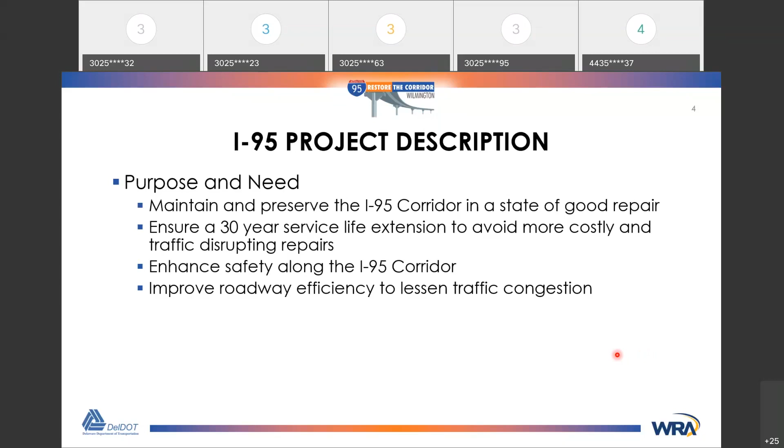So what are we doing? Well, we're going to repair everything within that corridor I just showed you. 19 bridges, several miles of pavement, including all the on and off ramps that access downtown. We are also going to be adding an additional lane on Brandywine River Bridge. When I say an additional lane, what I really mean is we're going to add an additional lane via striping, so you have 2 exit lanes to 202. That's going to be a safety improvement.

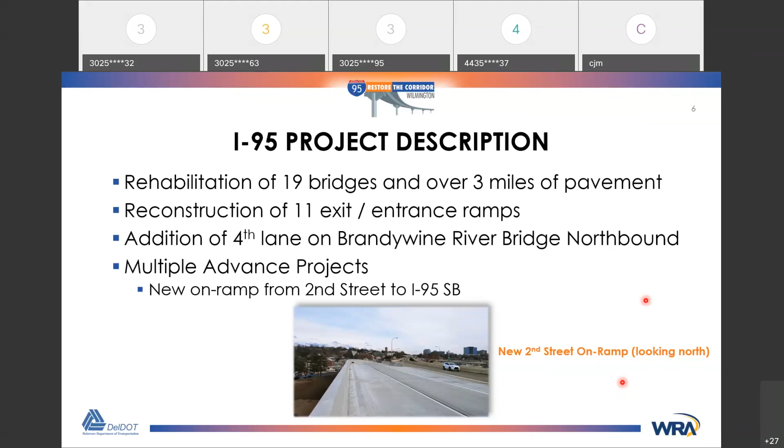Here we go. So here's what we really want to focus on tonight is our project schedule. As Craig had mentioned, we're really close to starting. And as I said a few minutes ago, in 15 days, we're going to start implementing some traffic control measures on I-95. And really what that means is our contractor, Kiewit Infrastructure, is going to be installing safety barriers, restriping the interstate. And the goal here is to ensure we have a safe work zone for their workers, as well as a safe highway for the motorists to travel.

So this is going to start the night of February 12th. Actual construction is going to start on March 1st. Now, the reason for this gap is it's going to take Kiewit 2+ weeks to get all of these controls in place. If you remember, I showed you that aerial view. This is a 4 or 5 mile long corridor, so it's going to take them some time to do this. And we want to do it safely, so we want to give them enough time to do that. But the big thing to remember here is February 12th, we're going to be starting to take a lane on I-95.

And in a minute here, Neil Leary is going to explain to you a little more in detail what to expect. I think one of the big goals here we've got is this 2 years of reduced lane capacity in I-95. We're committed to the 2 years. We're very confident of our schedule, and of course, weather permitting, we should be able to hit that 2 years. And of course, we'll do everything we can to minimize that or shorten that if possible. And of course, the overall construction is going to be 3 years, but the actual impacts to your commute on I-95 and using I-95, that's going to be 2 years.

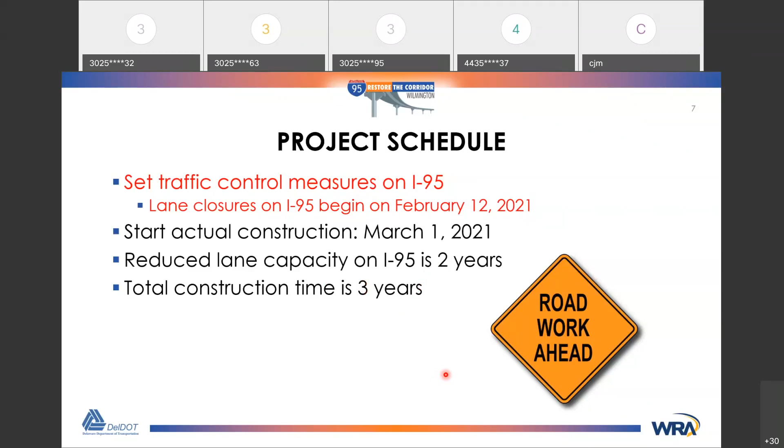But before then, what we want to focus on now is starting February 12th, for a 2-week period between then and March 1st, there's going to be some MOT or maintenance of traffic controls that are being put in place. And those, like I said, are necessary to ensure a very safe work zone. So I'd like to bring up to the podium, as it were, our lead traffic engineer, Neil Leary, and he's going to walk you through what to expect once this work starts on the 12th of February.

Neil? Thank you, Bill. Implementing the first phase of construction will occur over what we're calling a super weekend, starting at night on February 12th. There will be lane closures along I-95 southbound all weekend in order to remove and install pavement markings, remove and install guide signs over the roadway, and begin the installation of concrete safety barrier.

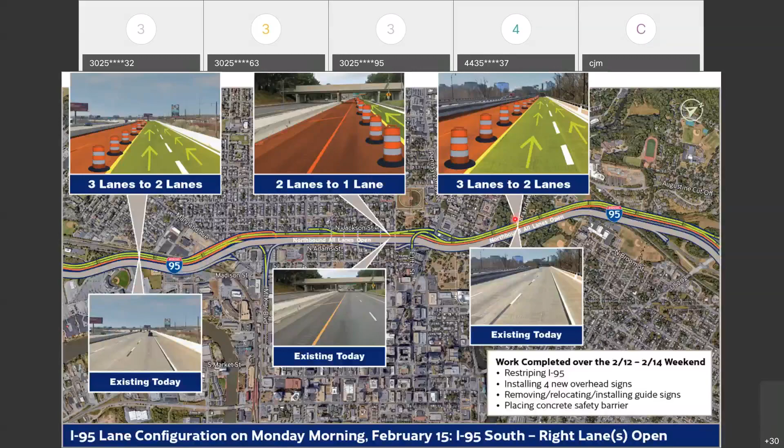In addition, over the super weekend, there will be a need to do nighttime, want to stress nighttime, closures of I-95 southbound on Saturday and Sunday night in order to remove and install new temporary guide signs which happen to span the entire width of the southbound roadway, requiring these closures.

All lanes on I-95 South traffic will be directed to exit the interstate at exit 7B and use Jackson Street to Lancaster Avenue, to MLK Jr. Boulevard, to Market Street, to access 495 South to get to 95 South. I-95 northbound will remain open during that closure. Next slide, Bill.

The following week will entail installing the remaining pavement markings, temporary guide signs, and concrete safety barrier that will ultimately separate I-95 northbound and southbound traffic on the southbound roadway, hence the teaser picture that Bill showed you earlier. This work will require some off-peak closures on I-95 South. Next slide, Bill.

I'm with you. I've just got these old computer keys here trying to get this.

Just bear with me, everybody.

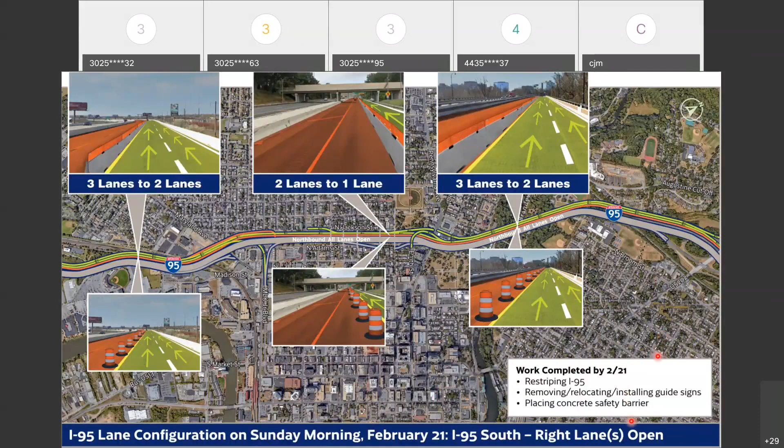Here we go. Okay. In addition, during that following week, there will need to be two, again, nighttime closures of I-95 southbound to install the concrete safety barrier that's in the city center area where there is insufficient width on the roadway to safely maintain traffic and install the concrete safety barrier.

During these closures, all lanes of I-95 South traffic will be directed to exit the interstate at exit 7B and use Jackson Street to Lancaster Avenue to Adams Street to the new 2nd Street ramp to get back onto I-95 South. Again, I-95 northbound will remain open.

I want to reiterate, these dates can change outside of the control of DelDOT or the contractor. For example, weather could play a part in this. But this is the current schedule of events to start the implementation of the first major phase of construction for this project. Upon completion of this work, I-95 northbound will begin to be impacted, which will be explained in a future public workshop. Go ahead, Bill.

Removing a travel lane 24/7 on I-95 will impact traffic, but DelDOT has been very proactive in developing solutions to mitigate these impacts. First effort is informing motorists to use the many alternative routes to get in and out of the city. These include 495, which has sufficient spare capacity to accommodate additional traffic, US 13, and state routes 2, 3, 4, and 9, just to name a few.

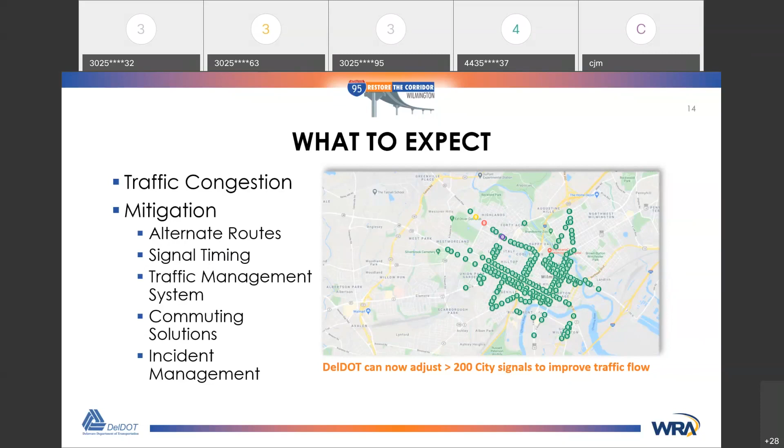Another effective way to mitigate traffic impacts is through the use of commuting solutions, which will be explained in significant detail later within this presentation. Yeah, Bill? Lastly, we all know that crashes can result in significant traffic impacts, especially within a work zone this complex. DelDOT is aware and has taken steps to minimize the traffic impacts associated with crashes. First, we have worked with the city, county, state, EMS reps, including police, fire, ambulance, and air response units, and have developed playbooks to provide information on responding to an incident given the work zone setup. We've actually developed 19 different playbooks for just the first phase of construction alone.

Second, tow trucks will be on site during morning and evening rush hours and on call in close proximity to 95 during the remaining hours of the day. The tow trucks will be deployed throughout the duration of construction to quickly remove vehicles from the roadway and reduce the congestion that's associated with crashes during construction. Go ahead, Bill.

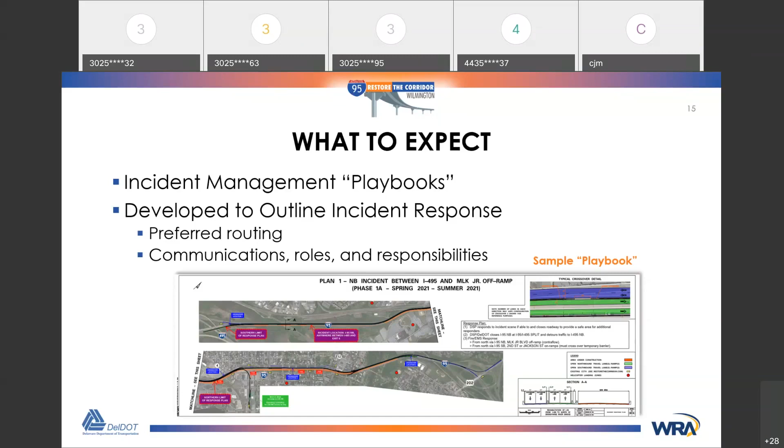Thanks, Neil. Obviously, you know what to expect. Any construction zone, we all realize that there's going to be noise, there's going to be dust, and I can tell you that our contractor, Kiewit, their contract requires them to do the work in accordance with the DelDOT noise policy. We actually have sent in the paperwork for a noise waiver, but the important thing is, we can't eliminate these issues, noise and dust and so on, but we can minimize them.

And with construction equipment in general, with hydro demolition, there are pumps that run this machinery. And then certainly there's a lot of concrete rehabilitation that takes place that will require concrete demolition. With dust and debris, our company is very committed to using a lot of water controls to keep the dust down from any demolition, which is also an OSHA requirement to protect the safety of our workers. We'll be implementing a lot of water controls to make sure that we keep dust to an absolute minimum on anything that requires concrete demolition or excavation.

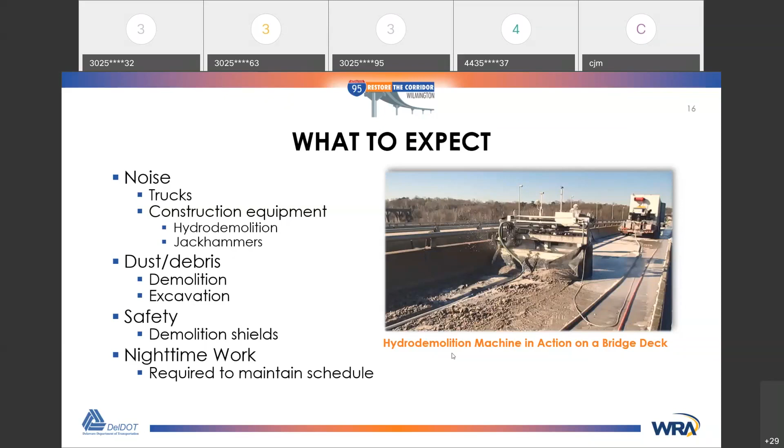So I think we're having some more. We got quite a few people on tonight, so our presentations are running really slow. So we'd appreciate it if everyone just bears with us as we get to the next slide here. So I'm going to reload the presentation, folks. I apologize. We just want to make sure

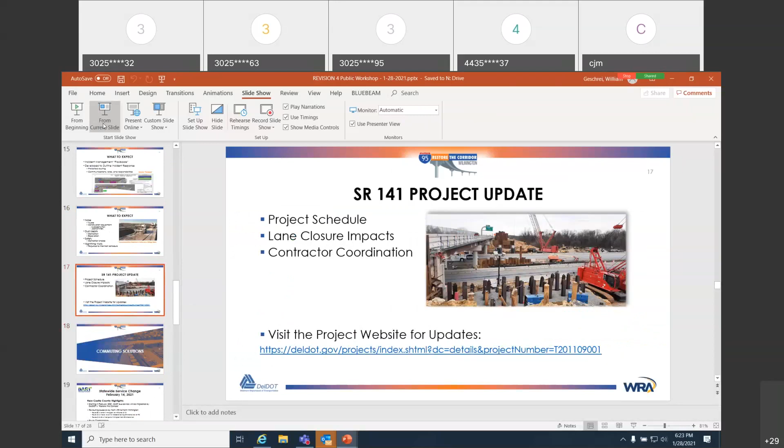So apologies for that. But while we had everyone together here, we did want to give you a quick update on the SR 141 project because it is so close to the I-95 corridor. So Sierra McLeod from the Department of Community Relations will give you a quick update. So hi everyone, this is Sierra McLeod, Director of Community Relations for DelDOT. And yes, we're focusing on the 95 project this evening, but wanted to take a minute to provide an update on another significant project, which is the ongoing reconstruction of Route 141 from the I-95 interchange to J Drive up near the Air National Guard and County Airport.

This 3-year project began in August 2019 and continues to make progress in what ultimately will be a completely rebuilt and improved interchange and corridor between New Castle and Newport. So we know everyone is eager to see this project finished, and at this time the project is on schedule for completion in spring of 2022. And we've made adjustments to get the remaining work done on I-95 first, where the new bridges are being built, so that there will be minimal impact on I-95 traffic as this project gets underway.

So the department has worked hard over the past 2 years to complete dozens of projects in and around the city and has not scheduled other projects that would impact primary detour routes until after the 95 project is done. So we're very sensitive to that, and we'll continue to keep the public updated as the 141 project moves towards completion, and know it will be welcome news to have this done.

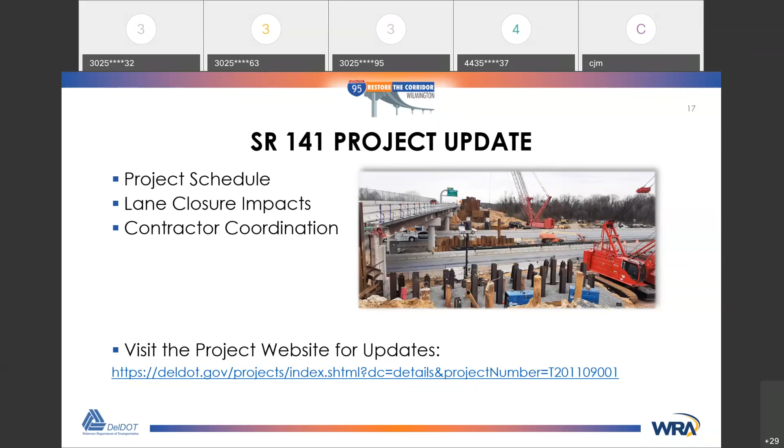Thanks, Sierra. So before we wrap up our presentation, one of the elements that's really critical is commuting solutions. Obviously, we'd like to have as many people avoid taking I-95. The less traffic we have, the better off we'll be. And so the department has come up with some options for those that commute or live and work around the area to be able to get to where they need to go. So we've got Kathleen Greer with us tonight from Delaware Commute Solutions to go through some of the options that'll be available to you. Kathleen?

Kathleen, are you on mute? Bill, I'm not sure she's on. Julie, are you on? You may have to do it yourself, Bill.

Well, I certainly can. I think it's pretty self-explanatory. And what's been happening over the last several months has been working with DART to really... Excuse me, Bill, I'm here. Oh, okay, great. All right. This is Kathleen Greer. Excuse me, I had to unmute everyone in order to have access, so a little difficulty. Sorry about that. That's all right. Take it away.

Anyway, good evening. Like Bill said, Kathleen Greer. I am the program manager with the Delaware Commute Solutions Group. And if that name is new to you, we were formerly called RideShare Delaware. We just learned about the most up-to-date information regarding the physical construction of I-95. And so now I'm going to walk you through what commuting solutions information, tools, and services are available to you so you can plan out your work commute and also your personal travel during the Restore the Corridor project.

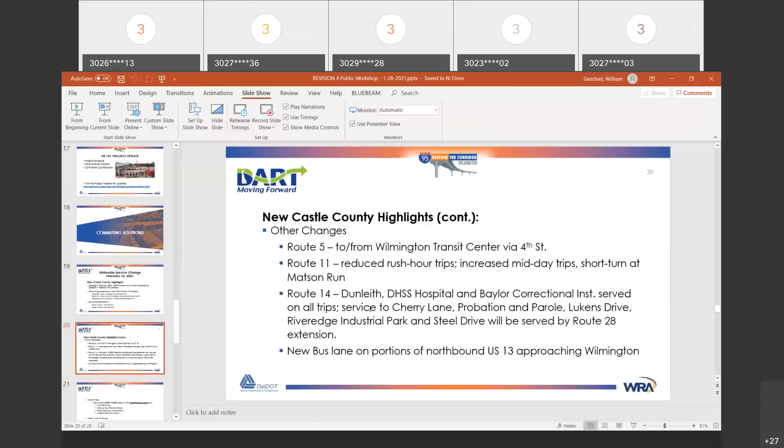So some of the additional changes that DART's going to be implementing with their service change are 7 service extensions to their existing routes. Just to give you an example of one of the service extensions, Route 64 is going to serve Christiana Mall. That's going to go up Route 7, and it's also going to have weekend service. And just so you know, all of the service change information is available at the dartfirststate.com website.

One of the other New Castle County improvements to further assist with travel times is that DART will be adding a new bus lane on... Kathleen, we lost you. Excuse me.

One of the other things I don't want you to forget about is the ability to make bus transfers at the new Wilmington Transit Center. And with the newly reduced fares taking effect on February 14th, the daily pass will now be $4. So there's no additional cost when you're transferring using the daily pass. If you could go to the next slide, that would be great.

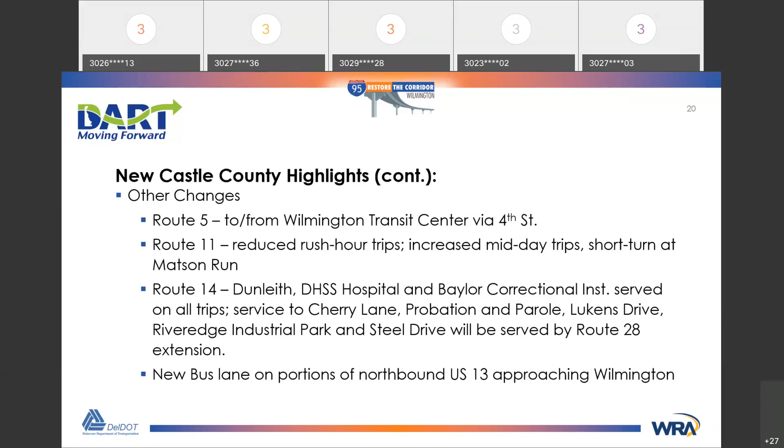Some of the other things DART has available are great, easy to use tools for riders. You can access them by downloading the DART app or through the DART First State website. The tools will help with bus planning, maps of the bus routes and stops, and bus information in real time. Touchless payments can be made using the DART Pass app, and you can take advantage of the 7 and 30-day passes through that app.

Another great addition to DART services is that all of the buses have free Wi-Fi now. You can also stay in touch with DART through their social media platforms. So you have their website, you have the transit app, but you can also stay in touch with them through social media. We can go to the next slide.

Kathleen, I would love to. The next slide, I'm just gonna... Well, keep going. When you get to it, you could do it as reference.

But another one of the commuting solutions is, so SEPTA has restored service. That started on January 24th. And so SEPTA has stations at Wilmington, Fairplay at Churchman's Crossing, and Newark. They are going to offer some specific peak time trains. So they actually started doing this. So it's 4 northbound trains, and that's from Newark.

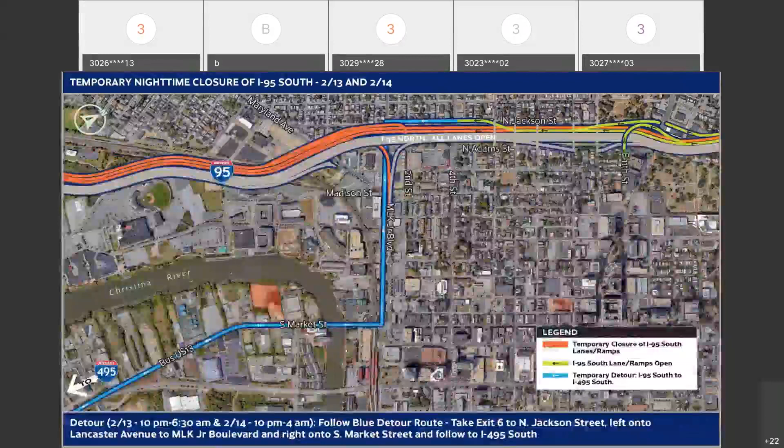As far as the new barriers and what they look like, I don't think we have that in this presentation, Bill, but we can certainly respond to this and maybe post something when we do the question and answer. But it will be basically a concrete F shape. F shape probably is Greek to everybody else, but basically a concrete barrier with a clear safety barrier above it, with the W etched into it. It's been posted before, so we'll get that to you.

Yeah, Craig, just to follow up on that, this acrylic barrier, we actually worked with the mayor's office and had several meetings to talk about it. The actual barrier is clear, but it will have kind of a sky blue color as opposed to what's out there now, which is kind of antiquated. It'll be located wherever you see the barrier now. Craig was referencing the old metal barrier with the fancy W on it. Wherever that's located now, we're going to have this acrylic barrier. And again, it'll have a white W on it to represent the city of Wilmington. It'll be a light blue color.

And I think what we can do is probably post some images that we presented to the city so folks can see what's going to get installed later this year. Yeah, I know we've had it on previous ones, and I don't know if we archive previous presentations on the site, but maybe that's something we could do. But we can definitely get that put up.

The site map, this goes to maybe Linda in CR. The site map on the app does not have anything marked as to how far up the highway this project goes. Up to Marsh Road, and where does the corridor project end below Wilmington, please? Now that is shown. I just saw the presentation go away. There it is. It extends basically from south of the Blue Rock Stadium all the way up to the Brandywine Bridge. Maybe it doesn't show it on the app, and perhaps that can be changed. Right here, the 495-95 split, and all the way up past Brandywine to just before the 202 interchange. This heavy blue line is the entire limits of the project that will be reconstructed.

Okay. Well, Neil, this is for you. It may be unfair to ask you this. I don't know how we deal with traffic lights, but you're well versed in it, so I'm going to rely on you here. Will DelDOT take control of the 4 lights in Newport, since Route 4 is a substitute road? Getting through there can be a nightmare.

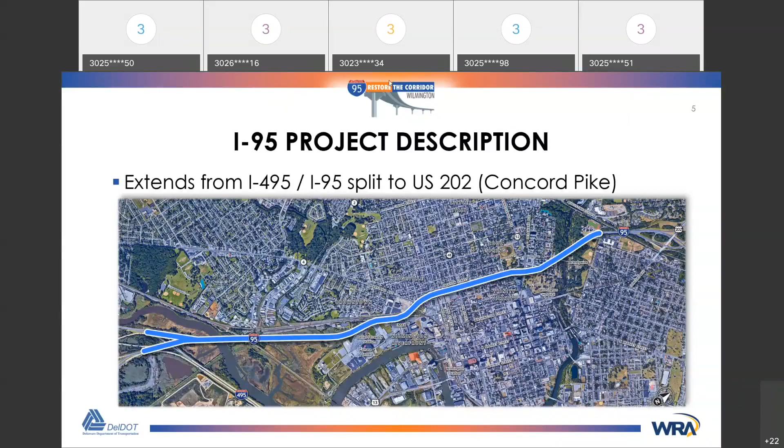I can answer that, Craig. Those signals are actually under DelDOT control. I have flagged this. I know exactly the 4 intersections you're talking about. It's at the off ramps at 141 and Route 4. We will take a look at it and modify as necessary based on the traffic conditions. But yes, I know exactly where they're talking.

Me too. And here's one for you too, Neil. There was a reference to 2 lanes and 1 lane of traffic. Do you mind reiterating, are we ever going to have 2 lanes in both directions during this period?

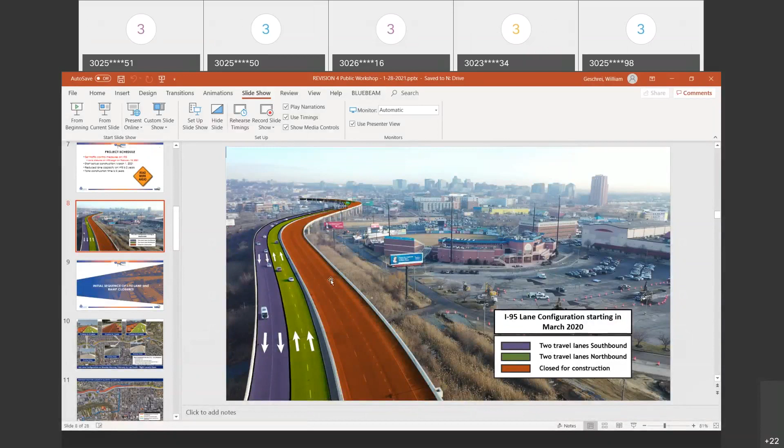So I guess to make it real simple, anywhere there's 3 lanes today on 95, northbound or southbound, there will be 2 lanes. And anywhere there's 2 lanes, which is essentially in the center part of the city area and the at-grade portion, there'll be 1. So essentially you'll have 1 less lane of traffic than what currently is in place today. Bill could pull up the slide. It'll actually show the 3 lanes and then how it gets reduced to 2. Mm-hmm. Thank you.

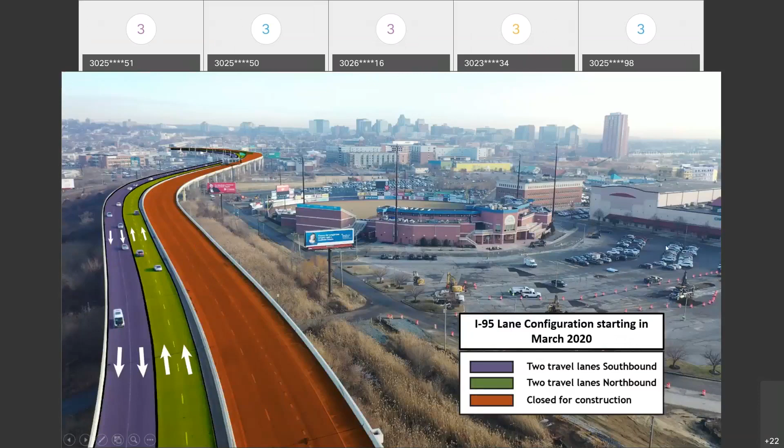Will DelDOT give another presentation on this subject? I will say this, this team is very happy to go to any community group, any business, school or whatever needs to have a presentation. We can show this presentation. We can cater a presentation to you, because honestly, we really do want to get word out here, and we want to lessen the impact of this project.

I also want to remind you that there's billboards, and really the best place is restorethecorridor.com to find all your needs, and then get the traffic updates and all that in case you forget, hey, there was a public meeting, that you'll get alerts on your phone, and that sort of thing.

Okay, someone is trying to tell us, I was referring to the on-ramp a bit north of I-495. It looks like it's from Lynn. What I would like to ask them to do is if you could please send an email to restorethecorridor.com, and we can address your question directly. Craig, I think I might be able to help. Oh, okay, cool. Be able to help Lynn with this one. I think she's referring to the on-ramp from I-495 to northbound 95.

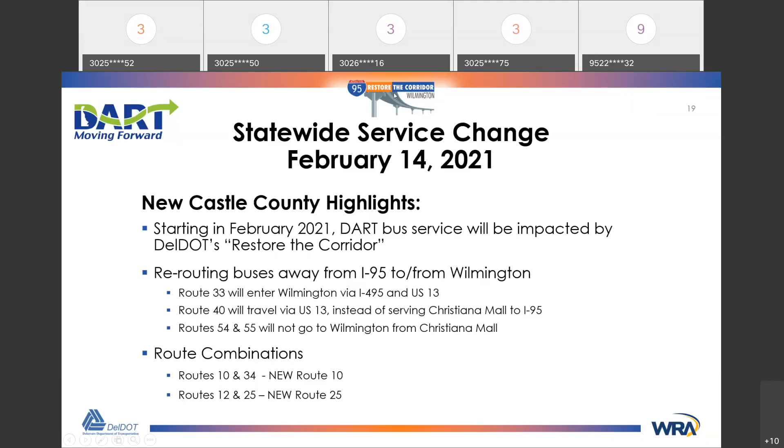Neil, I don't think this is going to be affected, but I've been wrong before. The 495 South exit to 12th Street, will that be affected? My answer is no. Sorry, Craig. Yes, that is one of the diversion routes. Okay. Anticipating people to take 495 to take 12th Street to get into the city. That's one of the intersections at 12th and 13th where we actually did an improvement to accommodate increase in capacity with the double left turn. So yes, we do envision, Craig, that will be a signalized intersection and a route that will be used as a diversion. And that's why you're the expert. Thank you, Neil.

Okay, for the traffic lights that are now monitored and controlled right now by the state, we're referring to the Wilmington City ones, I believe. Will there be any signage indicating that these signals can change from their normal rhythm? Neil, do you? Yeah, I mean, as Craig indicated earlier, there will be different changes. Typically, the signal timing changes that are in place change the splits, without getting very technical here. The splits in terms of how much green time various legs get throughout the day and the overall length of the cycle, how long it takes to go all the way around where everyone gets their green indication. So typically we're not changing per se, and it's not signed. It's just really modifying the timing. Perfect. Thank you.

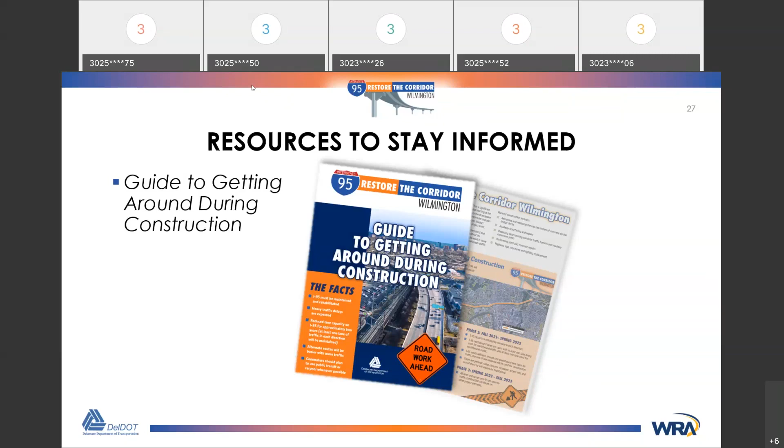Okay, I do have someone that's asking to repeat the site for online viewing. It's restorethecorridor.com. That's restorethecorridor.com. And if you're like me, a corridor has two R's, well, really three, but anyway, you can look up how to spell it. But here it is again, restorethecorridor.com. And Craig, that'll be under the Stay Informed tab at the top under meetings.

Very good. Thank you. And Craig, I just saw someone ask what time next Tuesday's meeting is. So that's New Castle County Council on Tuesday, February 2nd at 3 p.m. It is their land use committee hearing where we'll be presenting to the members of county council. And if you go to the county council website, there will be a link there. It will obviously be a virtual meeting, as they all continue to be. And we welcome anyone joining us there. If we have any updated information, we'll be sharing it with council and the members of the public who join that meeting.

Awesome. Can we use #77 to report signs? Yes, you can also call about ones that maybe have metal sticking out. This is important to me in the bridge design section. So if you can reach out to TMC, and I assume they can use #77 also. Is that true, CR? Yep. Use #77. I'm just seeing Tony just posted there about metal rods sticking up out of the cement. Yeah. Any potential hazard or issue, please call and let us know so that we can have one of our crews dispatched to take a look at it. Those are important things to know.